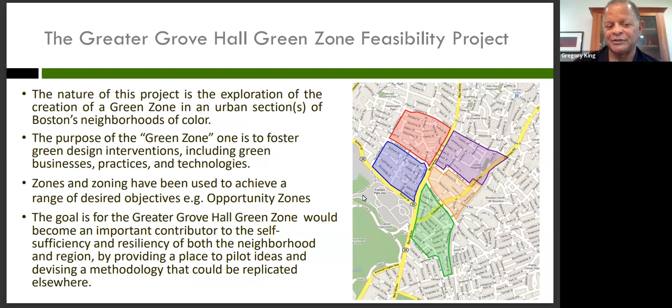Greater Grove Hall is probably the poster child for environmental justice. It's 3% of the land mass of the city of Boston, and it's 38% of the brownfields. It's got the highest asthma rates, probably the lowest income, high crime and other challenges. It's been really exposed to disproportionate environmental hazards, so it's a socially vulnerable community as a result.

Our objectives with the Green Zone planning framework are really around enabling community-led development, increasing awareness of the environment. We're using data visualization and geospatial data to essentially help educate community members about hazards that exist. We're looking to use innovation and investments, trying to change the dialogue from the typical project internal rate of return to the impact rate of return, and identify projects for investment by ranking them in terms of their impact on decreasing greenhouse gas emissions. Our goal is to help increase community resiliency from climate change and ultimately improve public health.

In the Grove Hall area, there is a significant number of residential properties. The link to the actual landscape analysis, which is quite comprehensive, will be available in the materials. 86% of the community is residential, 211 is commercial, and then we have about 87 that are non-residential.

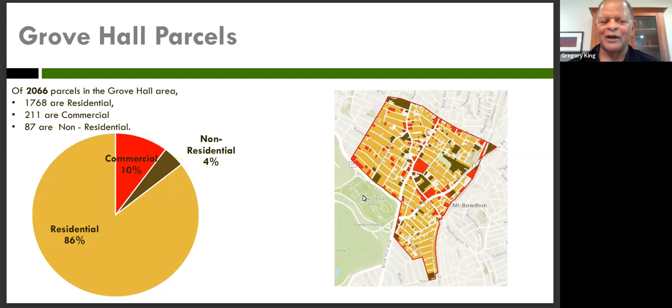Of that, there's only 9% of the buildings there that could be considered traditional single family. Most of the residential buildings there are either 2-family or 3-family, which is a significant amount, and the average age of those buildings is about 106 years. So decarbonizing those buildings will be quite challenging. We're doing this analysis to try to tease out where the high impact projects are, so decarbonizing 2- or 3-family homes should be a priority given the high percentage of that building stock in this community.

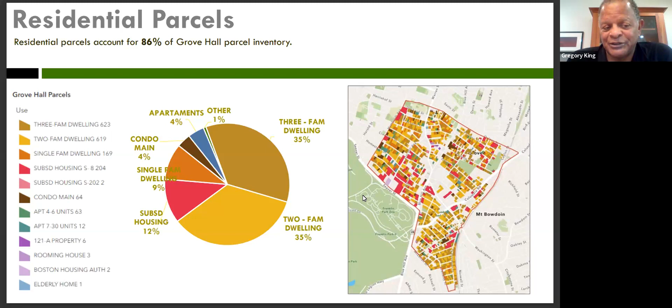We do have some non-residential parcels there, which are largely exempt buildings. There's quite a few vacant properties there that the City of Boston has, and then of course we have churches and schools and other institutions.

There's little or no green canopy, a lot of concrete here. It's a heat island, and as a result there are a lot of health side effects for the heat island impact. One of the things we are looking at is new technologies that would allow us to apply surface coatings that would reflect heat, and of course use of other interventions like green and white roofs.

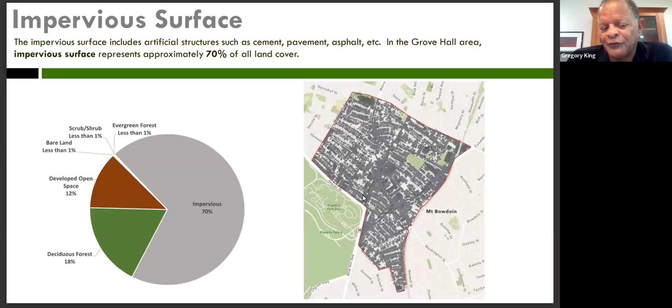Okay, and I think that's pretty much what I have to say for this morning. The actual landscape analysis in detail, which has gas leaks, distribution networks, buildings, hardscapes, transportation corridors, is all available through the link that will be shared. The legislation that's been filed is in both the House and the State Senate, and we continue to keep our fingers crossed that there'll be more resources and more funding for communities like Grove Hall to address harm that's been inflicted on their communities. Thank you for today.

Let's go to the next page. So on the right side of the slide is another page from the roadmap highlighting what the timeline looks like.

We don't want these roadmaps to just sit on the shelf after they're complete. PowerOptions has existing programs to help our members start to implement this. I want to note that we're about halfway through a pilot with Mass CEC. Our goal is to do about 30 roadmaps a year, and we're doing a pilot of 8 roadmaps, and we're done with about 5 of them right now. We're moving on through the rest of the pilot.

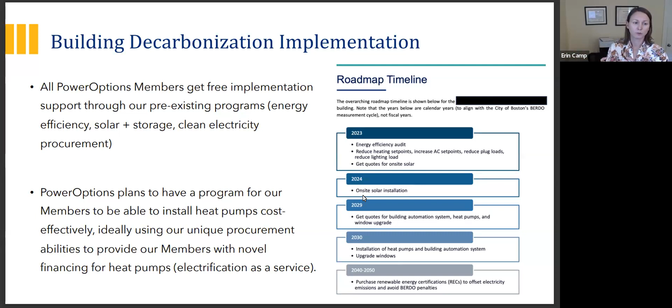And then jumping into the full program. Once a roadmap is complete, that is when PowerOptions starts to shift into implementation mode, helping our members connect into each of our programs for energy efficiency, solar, and soon a heat pump procurement program with novel financing so that our members can afford to get heat pumps in their building without huge capital costs. I think that covers it.

So that summarizes the Building Decarb Roadmap. If anyone's interested, please feel free to reach out to me, I would love to share it with you. Again, thank you so much for having me.

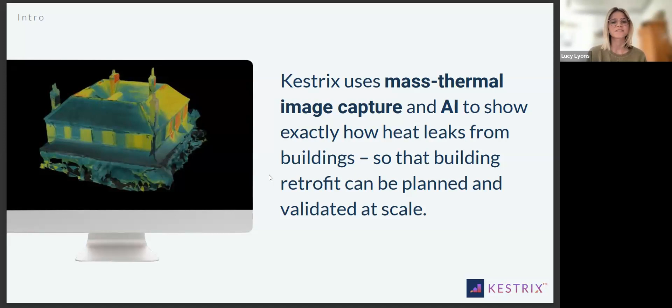We are using mass thermal image capture—think drones—and AI, specifically computer vision and machine learning, to show exactly how heat is leaking from buildings, so that building retrofits can be actually planned and validated at the city scale.

So how are we actually doing this at Kestrix? First off, we are scanning the built environment for heat loss. We're working with a number of partners to do this, including a couple of UK drone companies.

Secondly, we are building the software to extract energy performance insights—insights on how heat is leaking from buildings—with computer vision and machine learning algorithms from only exterior images, so no interior data needed. Thirdly, we're pulling this all together into a dashboard that a city, housing provider, or energy utility can use to streamline retrofit planning and verification, so you can understand where you need to retrofit first and look at the outcomes afterwards to verify those carbon emissions reductions.

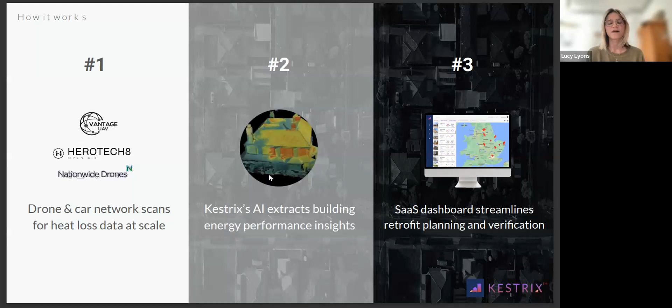So how does this actually work in practice? The four things you're able to see on the platform are: number one, which assets—out of dozens, hundreds, or thousands—are leaking the most heat. Secondly, you can understand where the heat is leaking exactly. Then, based on this, you can see what actually can be done to improve things and how much it will cost, so you can run a cost-benefit analysis at the portfolio level or even at the city or municipality level.

So the next question, I think, for any building physicists or thermography enthusiasts in the room, is: what is actually special and novel about what Kestrix is doing? Are we just throwing around the word AI, or are we actually doing something novel with it?

The answer is we're going to be first to apply machine learning and computer vision to do three key things. First, understanding the rate of emissivity from different materials by automatically classifying materials, so we can see what a building is doing in terms of leakage just from images. Next, we're training algorithms to detect thermal bridging and failed insulation, so you can diagnose a problem quickly. Third, we're predicting building component U values.

All of this together allows us to estimate the key metric of space heating demand intensity, basically the rate at which heat is leaking from a building. When you combine this metric with data about building geometry, you can start to estimate how much it would cost to put exterior wall insulation, for example, on one side of a house.

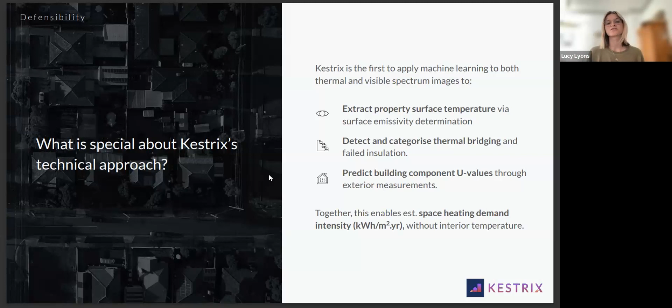So where is Kestrix in terms of our development? As I said, we're a relatively early stage startup. We've received a little bit of equity funding, under 500,000, and some grant funding, and we're really in the process now of delivering our first pilots for customers.

Our first customer is Clarion Housing Association, the UK's largest social housing provider, looking after about 140,000 units. They have a huge problem in that they need to retrofit, but they're not supported by the data that exists. They need to understand their stock better, in a time-effective and cost-effective manner. So how are we helping them when we don't have a full product up and running?

Well, first we scanned 20 of their buildings. We're converting those 2D images into 3D models so they can visualize heat loss. We're identifying thermal anomalies and grouping them, then coming out with a retrofit priority ranking. We're going to work on this data over the next year to refine it and make sure we're delivering the right things for Clarion.

But yeah, very much pilot stage.

The work we're doing for housing associations now is around planning and validating retrofit. But there are dozens of ways we intend to use our algorithms to accelerate building upgrades, from unlocking financing to enabling quantitative verification of CO2 reductions, to visually engaging stakeholders on the retrofit journey. When retrofits are happening inside your own home, maybe you want to understand what's going on.

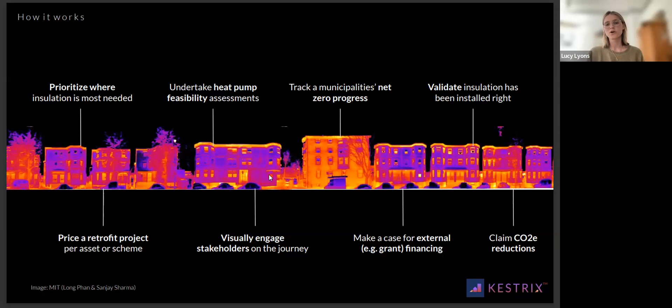What other sorts of traction are we seeing lastly? Like I said, we've raised some equity financing from Carbon 13, a Cambridge, UK accelerator. We were also successful in a bid for a $300,000 grant in a consortium with Peabody and United Living, a main contractor and a large housing association. And lastly, we've got a letter of support signed from a Big 6 utility.

We're totally in the UK right now, but I was especially excited to be on this webinar because I'm really looking forward to connecting with local government and stakeholders in the US to understand whether something like this could be useful for the market, especially given the recent IRA breakthroughs.

So I'll leave it with that. We're getting retrofit with Kestrix, and we really hope you'll join us, whether it's now or down the line. Thank you so much.

Wonderful, thank you so much, Lucy. And thank you to our incredible group of panelists — what fantastic and really intriguing presentations.